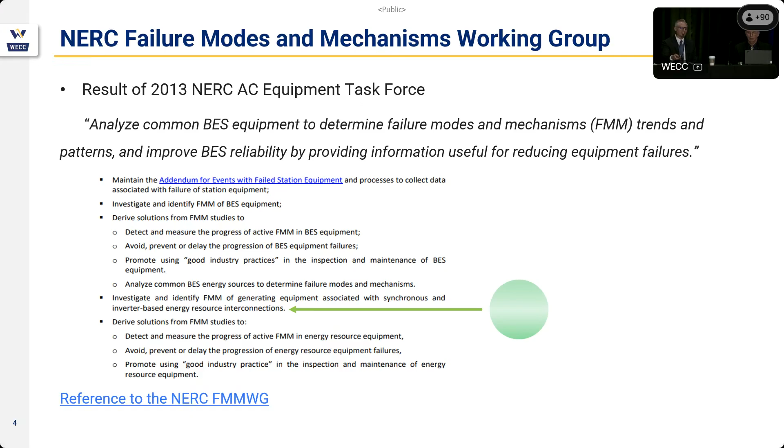So you have this slide deck, the reference to the failure modes and mechanisms site on the NERC website is there. It's limited, I'll tell you right now, because their main work product are these diagrams, and these diagrams aren't downloadable right from their site, so there's not a ton of information on that site.

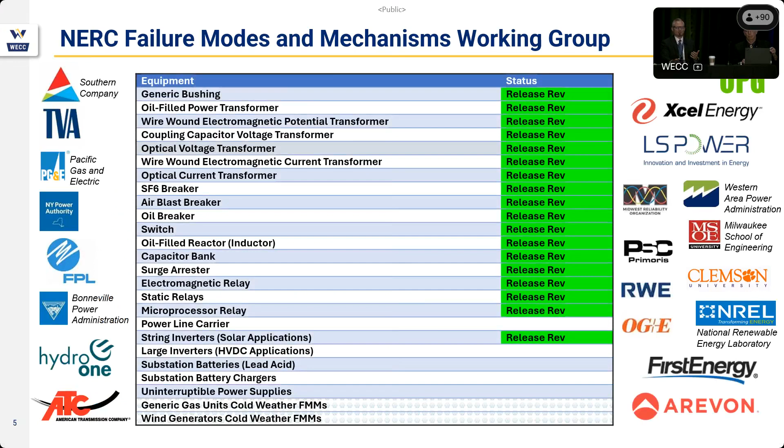All right, this slide just kind of gives an idea of what type of equipment these diagrams have been created for. So there are currently 18 released. We just got an email, 2 additional that are very close to being released. There are others that are in draft mode.

Take a look at the sides of that table there. These are entities that have given their subject matter experts time to work on developing these diagrams. I take a look at this table and I see hundreds of hours of subject matter expertise going into these diagrams right here, and that's why I think it's kind of a shame that they're not being used more, because there's so much value that comes from these.

And I'm going to turn it over to Bill. He's going to talk about failure modes and mechanisms.

And actually, the other part I want to point out with this slide really is the human capital, right? That represents a substantial investment of time and expertise, on which the grid survives, on the strength of the foundation of all of you participants with your expertise and as practitioners.

So this is work worth using, and it is reusable in ways that root cause analysis is not. You don't want it to be reusable, but a root cause analysis and a solution and a corrective action fixes that problem. A more systemic look can avoid what we have seen sometimes in compliance or after event analysis, where you can have a whack-a-mole effect, where you fix one problem and then there's another, and the two aren't linked. The failure mode and mechanisms approach is very powerful.

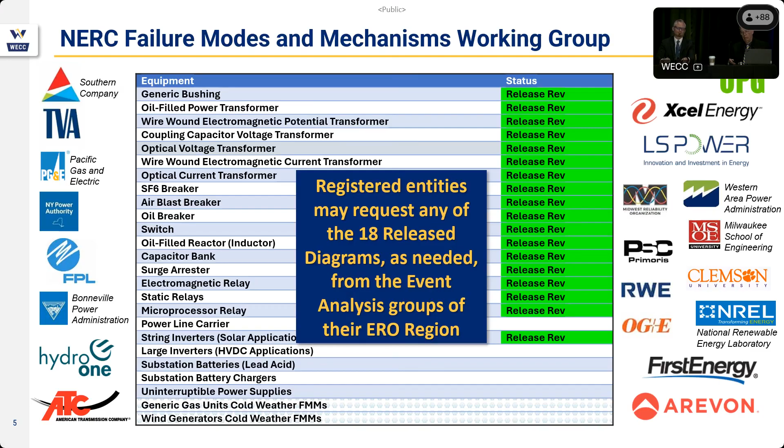So what would a before-the-break presentation be without a Slido poll about your thoughts on failure mode analysis versus root cause analysis? We'll go ahead and start that. What comes to mind when we talk about failure mode analysis versus root cause analysis? This is for you to enter. There's no right or wrong answers.

And we're not going to move on until we have 100% participation. Are you going to conduct assurance visits based on lack of participation? Yes, absolutely.

What versus why. Definitive versus speculative. Human versus equipment.

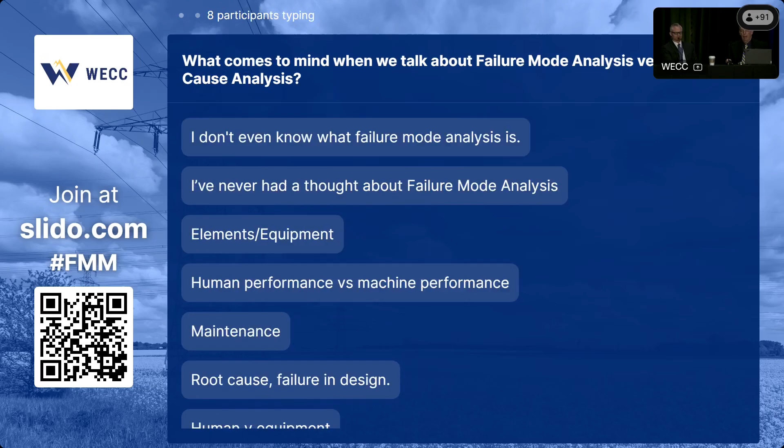Actually, at our next presentation in March they were looking at some of the human performance risks when looking from a ticking compliance standpoint. So, I've never thought about a failure mode analysis. That's okay, that's why we're here. Don't even know what it is. Hope you can have a better understanding after this. If not, we failed. So we're not going to fail.

Okay, this is good, so we'll go a little bit more here because we still have some more people. Mechanical versus predictive.

Or a failure mode could be applied to prevent issues in other areas. Yes, looking at it, right. We'll take a couple more, then we'll move on.

How do we operate in an emergency versus why we are in an emergency? The failure mode effects analysis applied to an emergency operation plan. I had not thought of that, but that's a potential application, which is more process rather than equipment. But absolutely, that right there is a good way to think about that.

Patterns of what could happen versus what did happen. We're starting to get a little bit closer here. Okay, we'll give one more and then we'll go ahead. So this is the behavior, then we'll move on or we'll run out of time. But this is great, I really like the variety of responses and thoughts.

Okay, so what we came up with, this is an incomplete list. It's not definitive, it's not the only answer, but a few things that come out are that root cause analysis generally is after the fact, event specific. The failure scheduled you, that was one I liked, I think Mr. Hackman came up with that. And it's often backward looking, like in the postmortem, it's 5 or more whys. I saw one, it was root cause analysis on one of the space shuttle accidents, and they had like 20 whys, something to that effect.

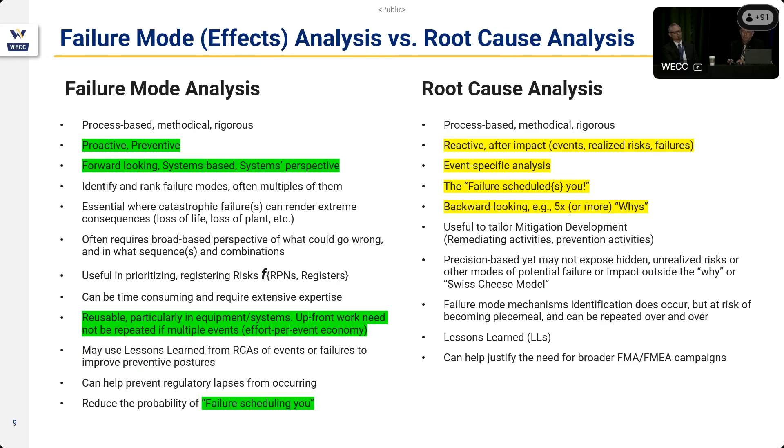Or afterwards, you can find a video that is after-the-fact analysis, after a very well-known - I'll probably slaughter the pronunciation here - Sayano-Shushenskaya Unit 2 failure. If you're into failure modes after the fact, it was a dramatic and tragic accident in Russia with a hydro unit, and it really had a very dramatic failure mode. That's after-the-fact analysis, and you can find that.

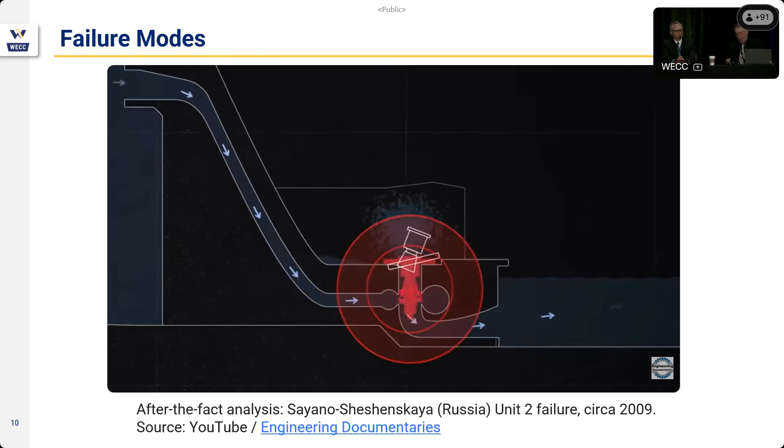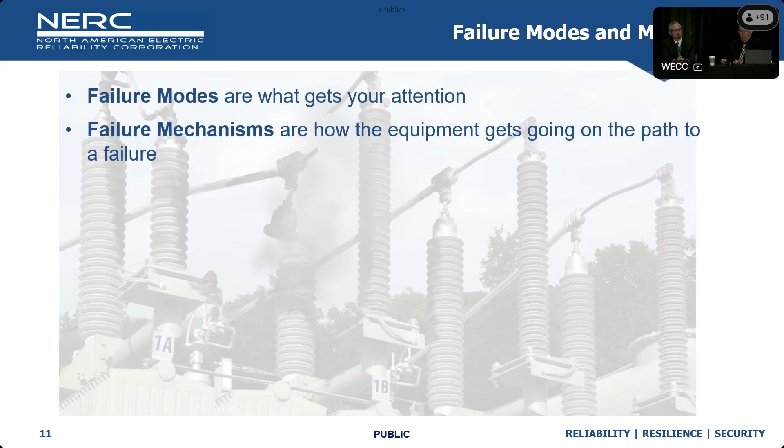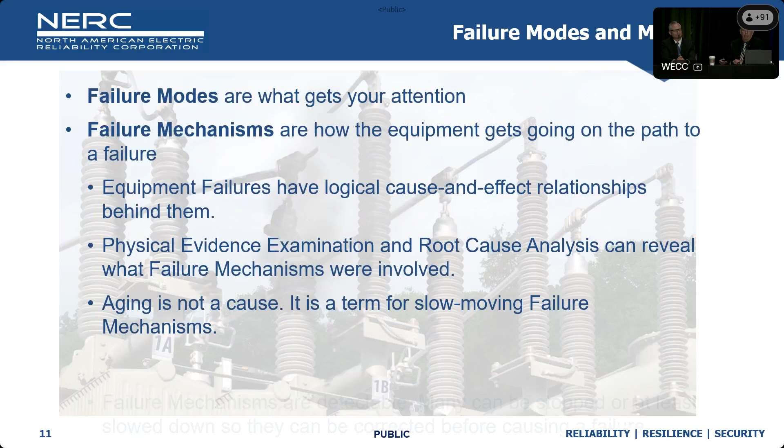So what the failure modes mechanisms working group comes up with is that failure modes, from their perspective, are what gets your attention. Failure mechanisms are how the equipment gets going on a path toward failure. Typically it's an equipment focus, but as someone mentioned in the Slido, it can be forward-looking for process - logical cause effect, physical evidence examination. Aging is not a cause - that's a slow-term, slow-moving failure mode mechanism, age of equipment.

Failure mechanisms are detectable if you get there in time. I think I remember when the NERC alert came out on breakers - James, correct me if I'm wrong - I think that alert came out, and within 48 hours we actually had one fail in Western Interconnect. So the alert came out, it was true to that, but that was really the original work that started looking at breaker failure modes. And that's why we're going to use that as an example, not for small and medium entities necessarily to go after their SF6, but to show really the thinking that went into this, and then how this is being applied to what we're thinking about in terms of small and medium entities in generation and cold weather.

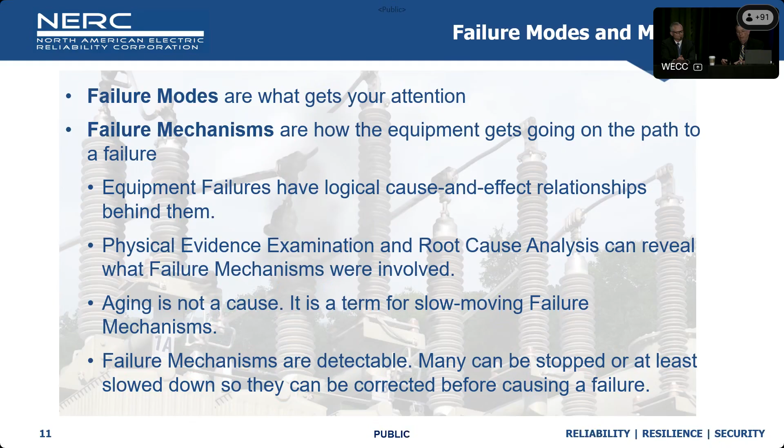So this is we're going to show what a generic failure mode mechanism diagram looks like. This group starts with basically you take the failed equipment type, and then what are the different ways that it could fail? You could apply this to a toaster on your countertop, your automobile, or in the electric grid - a power plant, a transmission system, a control center. In terms of equipment, but it could be applied elsewhere too. The failure mode mechanisms here are primarily with equipment, then trying to map, getting back to looking at the equipment and the different ways it can fail.

Similar to how Donovan was talking about standards development, you may do a mapping, but then things happen. If you have a general idea with some specifics about your failure modes, and then when things happen, you do your root cause analysis and say, okay, we have some specific instances that map to these failure modes. So they evolve over time and they're reinforced with lessons learned. And you'll see that.

So they tend to be logically oriented, that it could be this thing or that thing, or a combination of this and this. Sometimes in root cause analysis, you say, well, we had a failure or an accident or event because of several low risk items lining up at the same time. You could call it the shots on goal or Swiss cheese effect. This is an attempt to try to figure those out ahead of time, if you can find them before they happen.

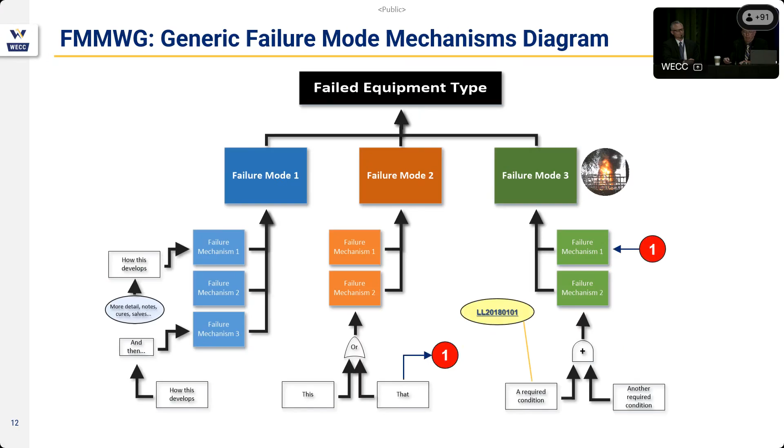All right, so this is a really busy slide. The idea is that we're going to break some of these down to show, we're going to get eventually to the specifics of what the cold weather, or what the failure mode mechanism group is doing.

So this is your generic SF6 breaker failure mode diagram that they came out with. And what the failure mode mechanisms group - I don't have the exact timeline on this, James - but one of the things they've started doing, particularly with interest in extreme weather and starting with cold weather, is asking are there things we're learning or things happening where we know some failure modes and have mapped them, with things like the sulfur hexafluoride? Are there particulars we know about, or risks associated with cold weather? What they're doing with these diagrams is you start to see that with the snowflakes, and we'll show those in a little bit more detail.

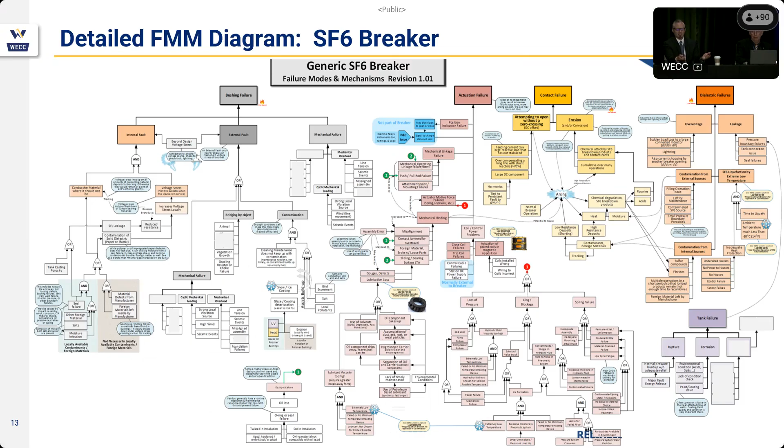All right, so this is going to be your test at the end of the hour, so take good notes. It's busy, right? There's a lot that can go into the failure of a breaker, though. So we're going to, like Bill said, take a look.

As you reach out, these are going to come in PDF, so you're going to get these diagrams. You're going to be able to zoom in on different sections because there's going to be a failure mode that you want to track. You're going to take that path down and see various different mechanisms that could lead to that failure mode.

Okay, so in this case, we're looking at the failure of a bushing causing an external fault. You follow that down. There's various different ways that can cause that failure of the bushing - bridging by an object, that's one path. And you take a look towards contamination, which is the path to the right. There's some notes on there pointing right to contamination.

Let's see, right. Oh my gosh, what the... oh, well, contamination we've got over here. Oh, there we go. Yeah, looking at the wrong part. Sorry about that. And I just swore, sorry, I thought I was in trouble there. I put the slides up.

No, this right here - and I don't know if you can read it, but it says this is more common in times of drought. Contamination builds over time. It can be dust, it can be ice, it can be salt, it can be bird excrement. There's a lot of different things that can build up on these bushings over time, and you can start tracking across those bushings leading to failure. One of those contaminants can be ice, so you get little nuggets of information like that.

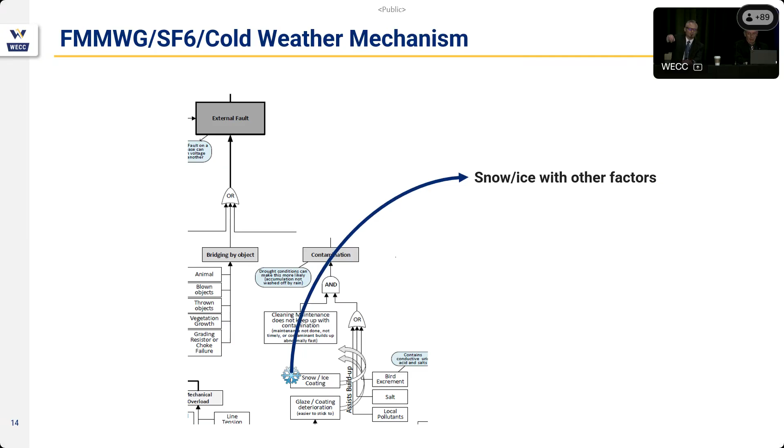Let's look at another failure mode here. We have had issues where these breakers have not operated, or they've been slow to operate, in cold weather conditions. What's leading to that?

Well, we've got a gas breaker here, but there's mechanical movements within that. Those mechanical pieces of equipment have lubricant on them to allow them to operate very quickly. And when it gets cold, that lubricant starts gumming up, turning to sludge instead of a nice, good lubricant to allow the opening and closing of that breaker.

And we have seen failure to open, we have seen slow to open. Neither of them are desirable, leaving faults on the system longer than they should and causing remote equipment to operate and clear that fault. Let's take a look at - okay, go ahead, Bill.

Oh yeah, and just one thing - we realize these are eye charts, but we're fond of toolkits. So the yellow ovals are mapping lessons learned that are on the NERC website. You're stealing my thunder, Bill. Oh sorry, go ahead. Well, you see these yellow boxes right here.

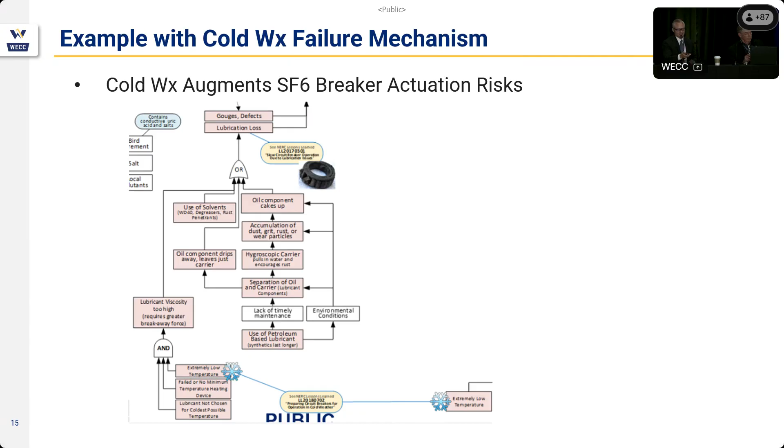And that's really what's neat about this - we've got a diagram of a common piece of equipment, and we're bringing in, hey, we know that this is a potential failure mode related to cold weather. And if you want more information, you can take a look at this lessons learned that a peer has provided about a real live event on the system. So I hope you're starting to see these diagrams really do start tying multiple work products together as we dive into these a little bit more.

Let's dive into some of this - another interesting part right here, even just in the title, there's a tie to some lessons learned. We start tying into different storms that we've had on the system. Let's dive into some details here.

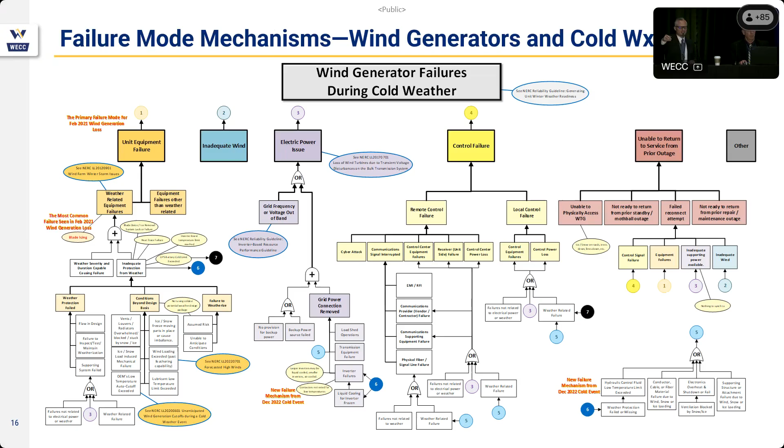Okay, this background, that's called blade liberation. That's a fancy way of saying you've just shot your blades off your turbine. It doesn't happen often, thankfully - it's a failure mode that's rare. We probably wouldn't have as many windmills if we were shooting 200-foot blades around commonly. But there's some cool YouTube videos if you've got spare time.

Not now, there's a test, remember? So...

Yeah, unit failure - this is a well-known issue. In fact, it was a major contribution from unit failure equipment to a small winter storm, February 2021. I think somebody called it Uri - yeah, that's what we're talking about, Winter Storm Uri. We're starting to pull in disturbance reports now into these, so now we've pulled in lessons learned, pulled in disturbance reports, and we continue down, and we say the most common failure seen in Uri leading to wind loss was due to blade icing.

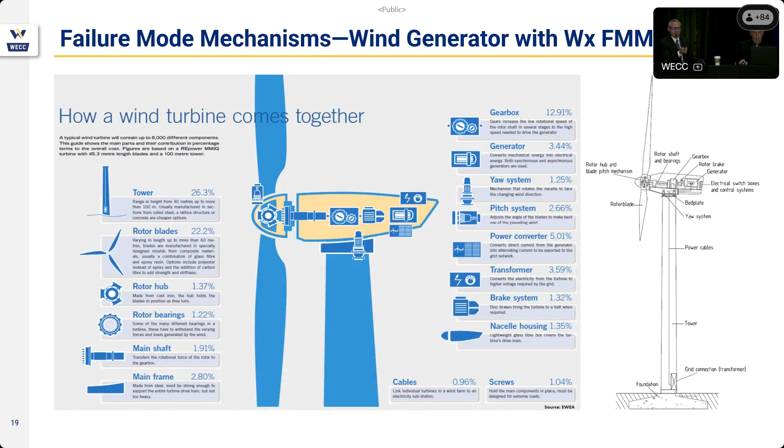As we take a look at failure mode, I'm going to talk about failure mode number 2, which was fuel loss. In this case, there's no wind, and we say, well, what do we do in that case? Well, that's why it's pretty empty - there's no path beyond loss of fuel. But I did want to talk about it a little bit. It becomes an issue because...

Winter Storm Heather was less than 2 years ago. We don't hear a whole lot about it because there wasn't any large-scale outages, but energy was tight for several days in Winter Storm Heather. We had several energy emergency alerts. There was one particular balancing authority - well, a generator owner - with over 800 megawatts of wind in their generation portfolio. The wind forecast was going to be low, they were predicting about 120, but they had single digits that day out of 800 megawatts of wind, less than 10 megawatts of production. They went into an emergency alert 3 because they were low on reserves.

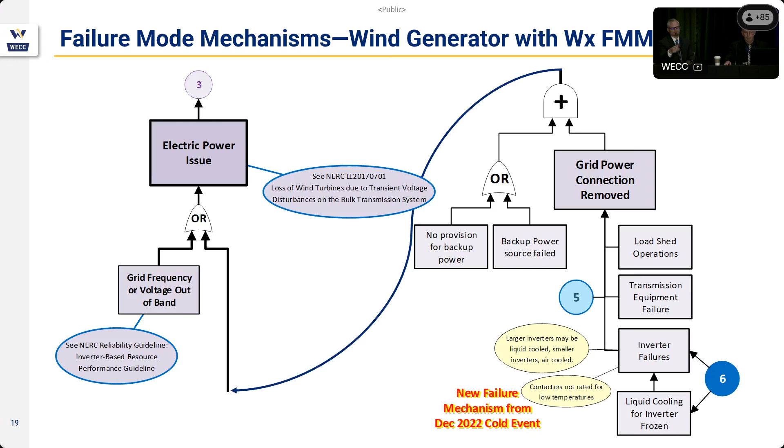We're going to talk about control failures. These can typically happen in two different ways: remote or local. Local, you usually have a plant power outage or equipment outage. Remote, they can be those similar things. You can have a loss of communications, less frequently, but a possibility could be a cyber attack as well, something interacting between you and the plant at that control center.

So while there are a lot of potential paths on here, Bill actually has an example from a previous job that actually happened in this failure mode. So Bill, you want to share that example?

Sure, thanks James. And one thing I was going to mention on the lessons learned with some feedback there is that, as far as I know, the failure mode mechanism working group welcomes participation. If there are things in the lessons learned where there was a mapping that maybe is incorrect, or asserts something that say a cold weather package doesn't do, these are living documents and they get better by learning, most of which we started at the top of the hour with coming from industry, because that's where the expertise is. So the example James is referring to, it's interesting going through this and looking at the failure mode mechanisms.

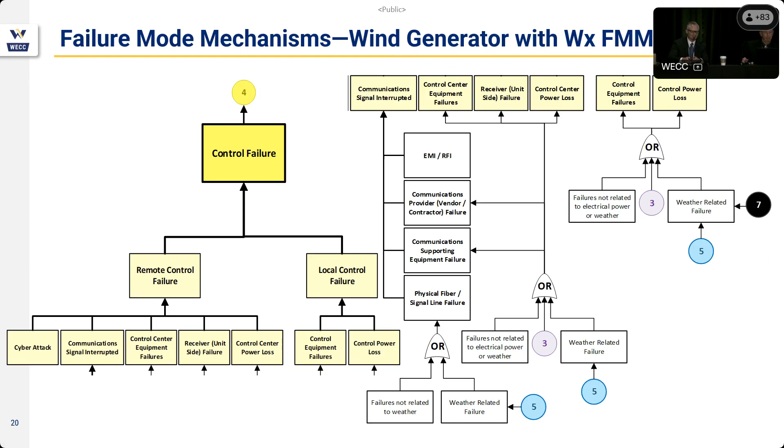Yeah, thanks Bill. All right, this is going to be, we're going to talk about a recent failure mechanism that has been added to this slide, or to this diagram, and that is the failure mechanism of weather-related failure. Some of these were seen in Winter Storm Elliott.

Well, Winter Storm Elliott. So, and there's several of these. Anytime you have liquid, a lubricant, when it gets extreme cold, you need to make sure that that liquid is designed for those temperatures that you're seeing. If not, that is definitely a failure mode, a failure mechanism that can lead to the loss of your plant.

You get snow and ice loading. This can impact conductors, it can impact cables, it can impact structures. That can get very heavy very quickly, and it can lead to failures. Ventilation areas where you're pulling air in, that airflow can be blocked and result in failures.

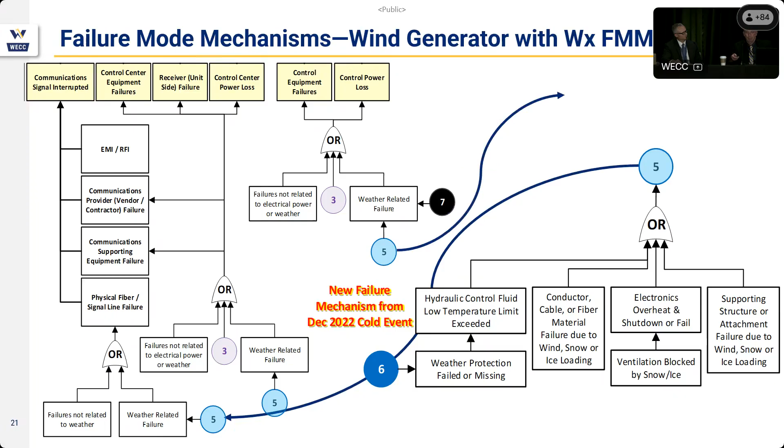So we did get Elliott there. The next example, we're going to walk through a combustion turbine, just an inlet icing example, another one that the failure mode mechanism group worked on. Gas generation loss from cold weather, starting with primary failure mode. Again, the flow diagram will come back to weather and some weather mechanisms. If you have things to comment on, go ahead, James.

Where did this originally come from? February 2021, a 34,000 megawatt outage. So there was a lot of learning that came in on that. We have a link to the presentation on those cold weather outages and what was happening with regard to cold weather and loss of gas generation.

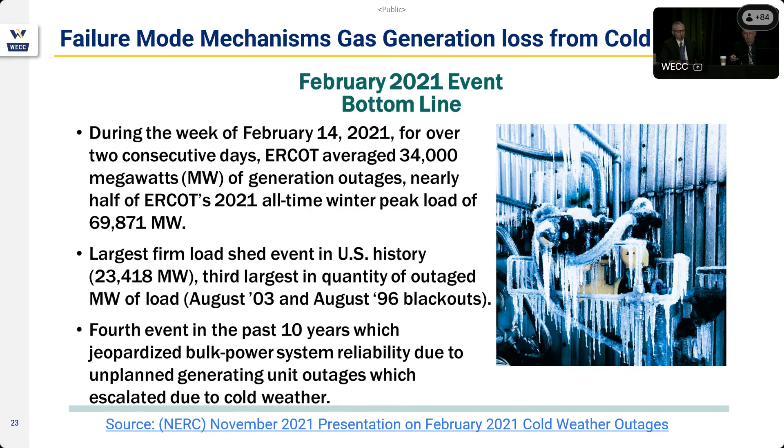This is just a representative plant diagram that sometimes when failure mode mechanisms are developed, you can look at. This one in particular is specific to inlet heating and evaporative cooling. No vendor is referenced here on purpose.

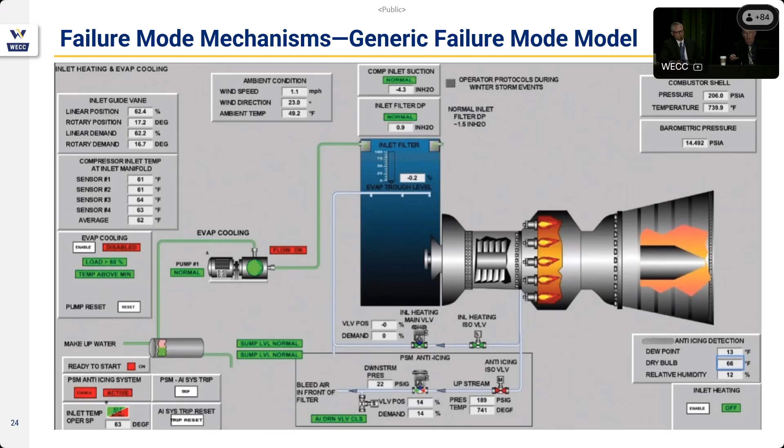Gas unit fails to generate during cold weather. So the preference would be to figure out what the potential failure mode mechanisms are versus a root cause analysis. Sometimes you do start with a root cause analysis, or the root cause analysis augments what your failure mode mechanisms development looks like.

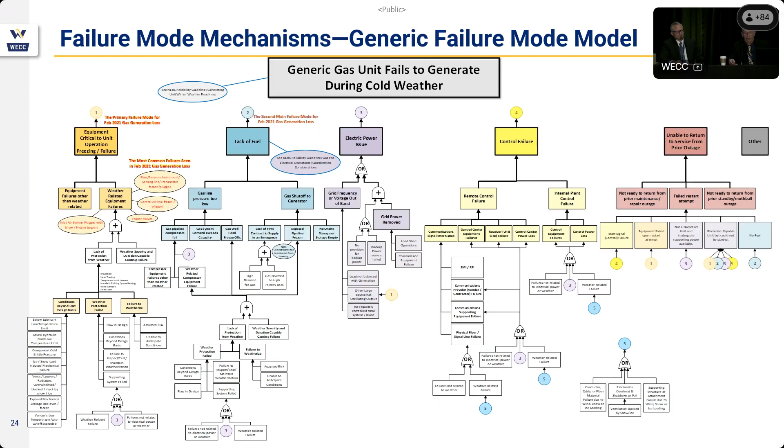Here's one where there was equipment critical to the unit operation. There's a mapping of the failure - control air line frozen, frozen valves, inlet air. Lack of protection from the weather, combined with weather severity and duration capable of causing failure.

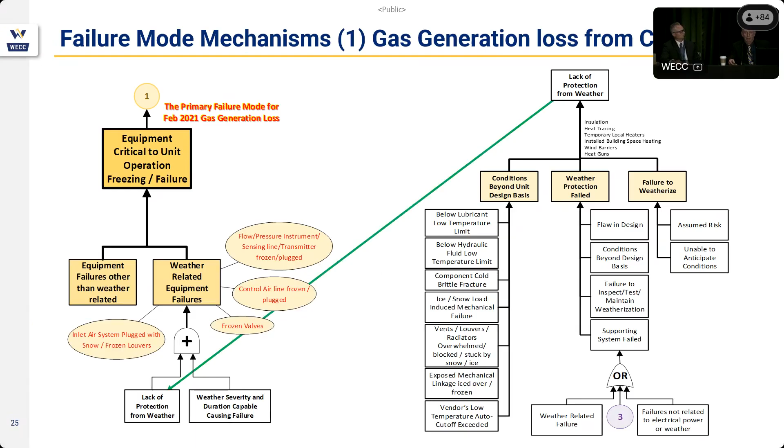All right, this next section, we're going to go back to a diagram we went through and look at inverters. This is embedded in the failure mode diagrams. And James, if I remember correctly, we don't have one specific to inverter-based resources yet, correct?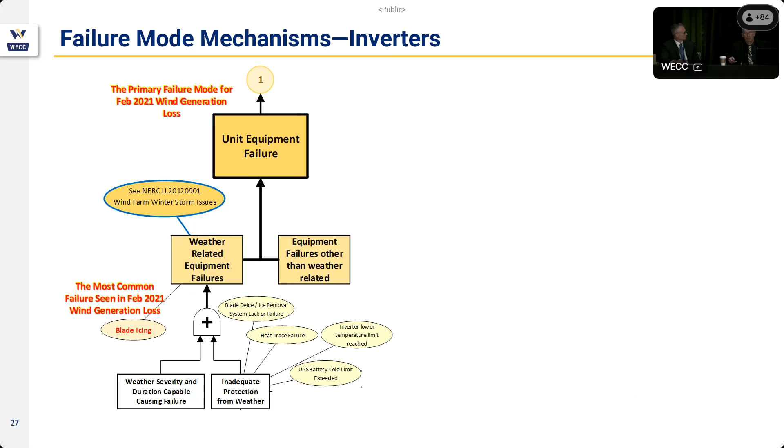And to show the reusability here, this is coming from wind turbine installations. But if you had systems in facilities that you're looking at for cold weather preparation with inverters, there may be opportunities here to look at that with regard to where inverters are being used.